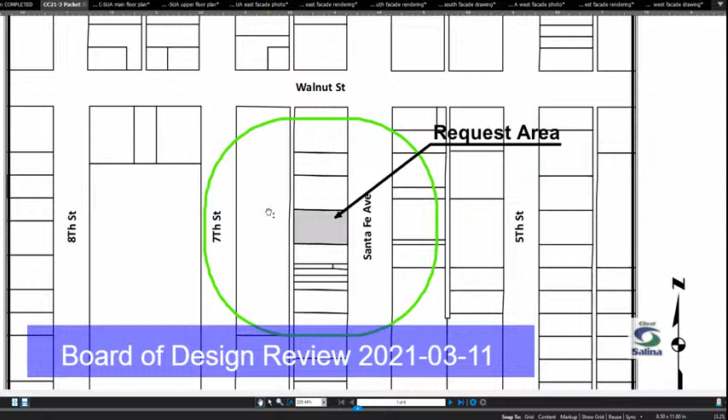Thank you, Mr. Chair. This application has been filed by Mr. Warren Eddiger on behalf of Salina Urology Care Center. The request is for approval of a certificate of compatibility to allow exterior facade modifications to be made to a building located on the west side of South Santa Fe Avenue in the downtown area. The specific legal description is the south half of lot 148 and all of lot 150 on Santa Fe in the original town of Salina. This property has various addresses ranging from 216 up to 222 South Santa Fe.

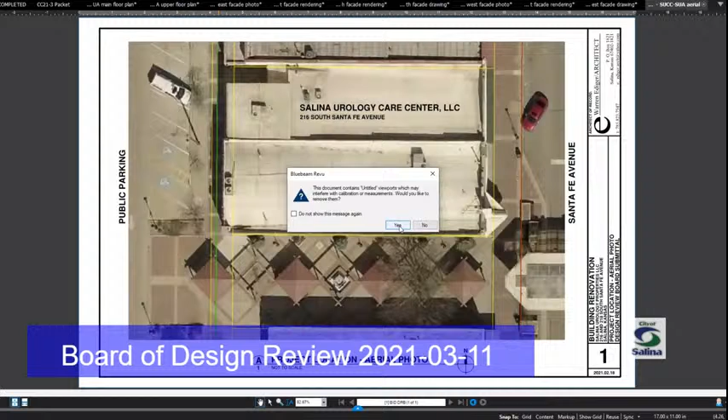So what we have here is a case of a change in ownership and a change in use. We had the long established Vogue Theater, which was in this location starting in 1938 and closed its doors in 1994. In 1995, the building was renovated by the Clubine and Rettele Chartered Accounting Office. They were located next door to the north and expanded into the theater space. When they completed their project, there were only a few features left from the theater, one of which remained was the theater marquee sign, which they retained and modified to include in their company name.

They worked with a local architect at that time, DMA Architects, and they had two cases that went before the Downtown Design Review Board in 1995. Some of it involved replacement of entry doors and doing things with the former ticket booth on the east wall of the building. There were also some inset windows along the Santa Fe storefront that had panels of upcoming movie events, and those were filled in. Then finally, the marquee sign was modified into a dark bronze and stone color, and obviously the theater message was removed and the lettering was changed to certified public accountants.

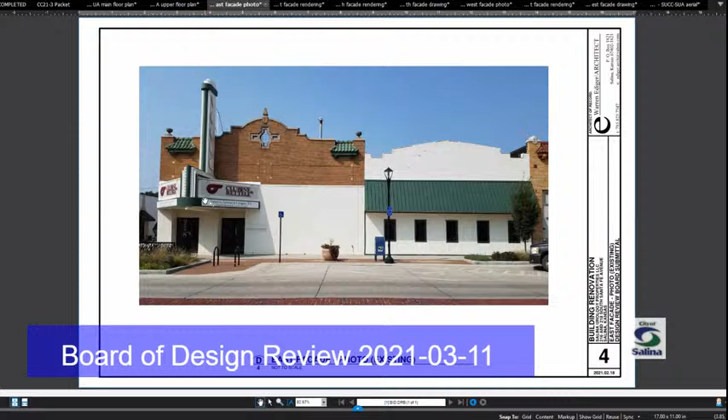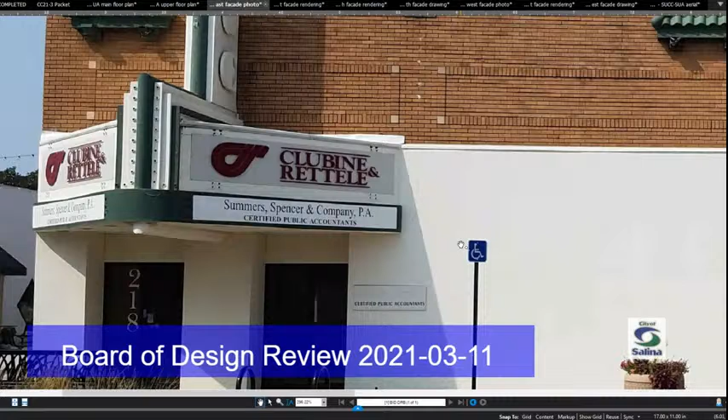Then in 2017, there was an application that came before the board to further modify the sign because the accounting firm merged with a firm known as Summers, Spencer and Company, and so the sign was modified to add those names. Now we have a new owner. The accounting firm has relocated, and the new owner has plans to renovate the building and convert it to a care clinic.

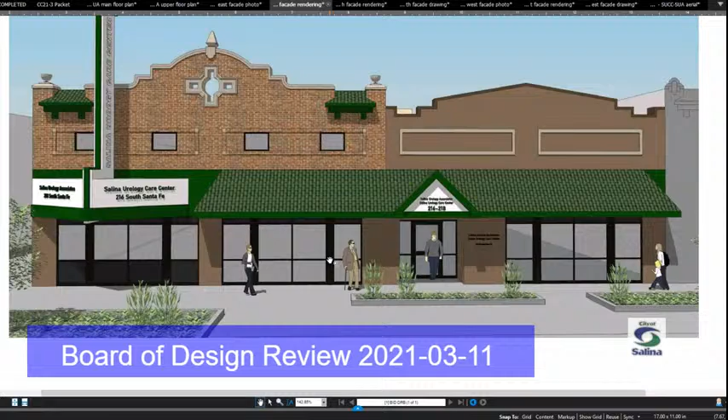They do plan to retain much of the exterior masonry, but they also plan to add and replace some exterior features. If I misdescribe or misstate any of these, we do have the architect here to correct me. But as we looked at this, we saw that there was going to be the placement of new stucco on the exterior in some locations. There would be a brand new storefront and storefront entrances.

The existing marquee sign would be repainted. There would be new wall signs added. And then in select locations, there's installation of a new roof canopy with metal roof tiles to match the existing ones on the building. So I've done my best in the report to summarize those changes as staff saw them. I think the most dramatic one is the new storefront window system and entrance that would be proposed on the front of the building.

It opens it up quite a bit for natural light and openings. There's a new roof canopy over the middle and north storefront bays, planned to match the existing tile on the building. There's new upper story windows on the south building and new stucco face and trim on the upper story of the north building.

For the most part, the existing stone and brick on the upper story will remain unchanged and look similar to the way it does today. On the south wall, the exterior brick wall will primarily remain unchanged.

On the west side, facing the public parking lot, there's a proposal to infill one of the existing windows. There's going to be new upper story windows installed. There'll be some new stucco face and trim applied to the west wall, and a new exterior stairway to the upper story will be constructed on the back side.

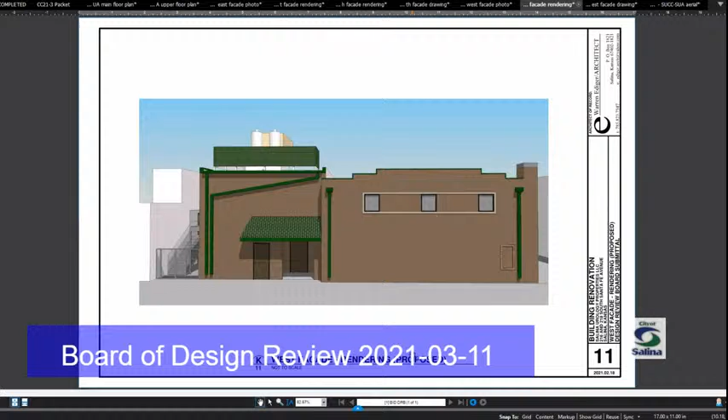So as we reviewed this, this is not new construction, but it is alterations. Any building materials that are used should be visually compatible with the predominant materials found in the downtown area. There's a goal to maintain the established building scale, to maintain alignment of horizontal elements along a street block.

Materials should be traditional to those used historically. And then the one that I think has the most for discussion and has different perspectives is one policy goal is to maintain all aspects of the storefront when possible.

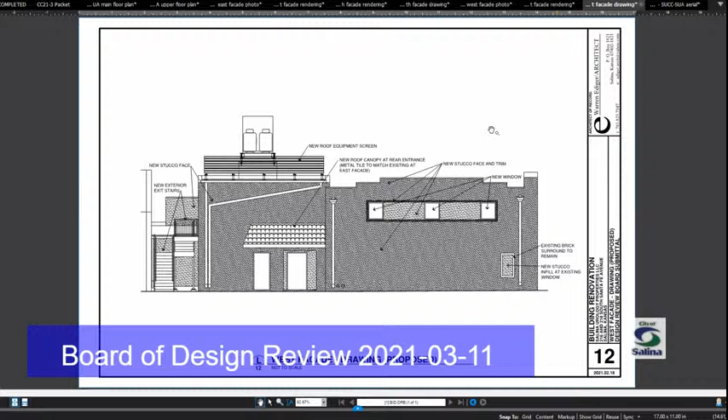There's some things that are contradictory there about maintaining storefronts and also making storefronts pedestrian friendly. And that's probably what we'll focus on.

There's also some guidelines about awnings, which would apply to the canopy as well. And then they are proposing to maintain the marquee sign.

This renovation covers all three building facades. We have a street face facade. We have the south facade that actually faces Spillman Plaza. So this building's open on three sides.

And so this storefront change would convert what today is largely a blank wall, and it would dramatically increase the ratio of glass on the front facade.

While the design guidelines recommend preservation of original storefronts that are intact and restoration instead of replacement wherever possible, in our review of this, staff doesn't believe that the existing storefront that's there today could be considered original because substantial modifications were made in 1995.

And so we've recommended that the board in their review of this look at surrounding buildings on this block and determine whether you think the change to a more of a glass facade would be compatible with the appearance of nearby buildings.

The other changes to the south and west are primarily maintenance related and cosmetic, and not as dramatic as the change on the front. The sign, while not necessarily historic, it was retained in 1994.

It is immediately recognizable and visible when people travel Santa Fe. The profile of that sign is not being altered. And so the replacement sign appears to respect the size, scale, and design of the original building facade and the sign.

We don't think that there's anything being done with the marquee sign that would detract from the building facade or any surrounding businesses.

This building has 75 feet in width, so it would allow up to 225 square feet of total sign area. So it's your responsibility to look at the signage and determine if it's in character with the surrounding property.

We just noted that all the building records associated with the Vogue Theater portion of this building are at 222 South Santa Fe, but that entrance was at the far south end, and this is going to have more of a center entry. So we do think 218 South Santa Fe is the appropriate address for this as proposed.

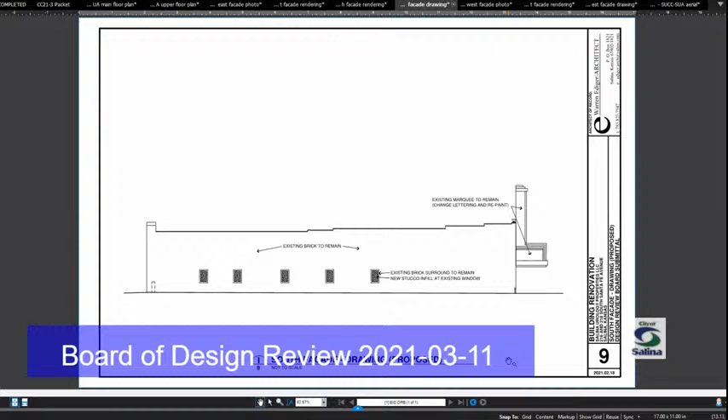We offered some findings that might support not approving this, and some of those deal with maintaining the original ratio of window and storefront openings to solid wall. But if the board views this as a step in the right direction, not the wrong direction, then not preserving a storefront that's not attractive in its own right is, we don't see as an issue.

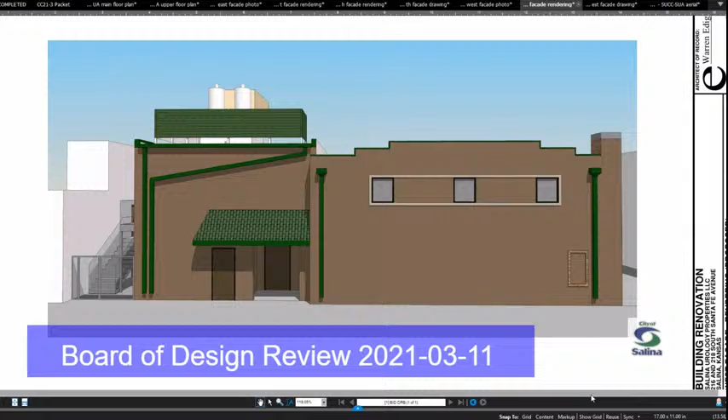So we've offered some findings that the use of finishes and materials for the signs are compatible with the predominant sign materials in the area. The sign would replace existing signage of the same physical dimension. There aren't going to be any architectural features obscured by the signage, and the existing profile of the marquee sign will not be altered.

So your alternatives this afternoon would be to approve the certificate of compatibility application as proposed, finding that it conforms with our design guidelines. You could approve it subject to any special conditions or revisions the board sees fit to apply. You could postpone consideration to acquire additional information, or you could deny the application upon making findings in support of denial.

So following review of the application and any additional information presented at the hearing, we would recommend that you take whatever action is in the best interest of preserving the character of downtown Salina.

If you choose option 2, to have any sort of condition of approval, we would just recommend our standard condition that if there are any significant changes to what was presented and approved by the board today, we would be notified and would determine whether any additional review by this board would be required before those changes are implemented.

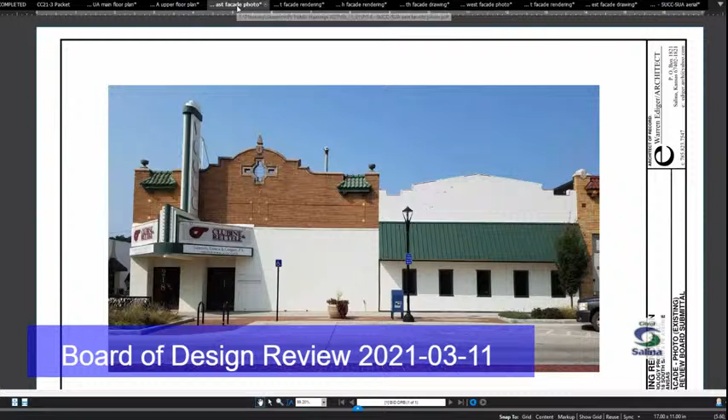On the north building, the stucco that is on there—the entire block is exposed brick, and it's interesting that this one building isn't. I didn't know if there's any history behind that, why stucco was applied, and why it's being maintained, or if it's something that could go back to the original brick. Are you referring to the lower level or both facades? Both facades, and then carrying across onto the lower level of the south building. I'm not sure if that's stucco or not, but just a little more clarification on why that one building is different than the entire block.

Can I go ahead and answer that? Sure. If you look at the south or west side of Santa Fe, starting with the Klubine building and going north, you'll find the majority of the buildings look like the Klubine building, Old Chicago, and the rest of them. The detailing and the time of construction are all very similar.

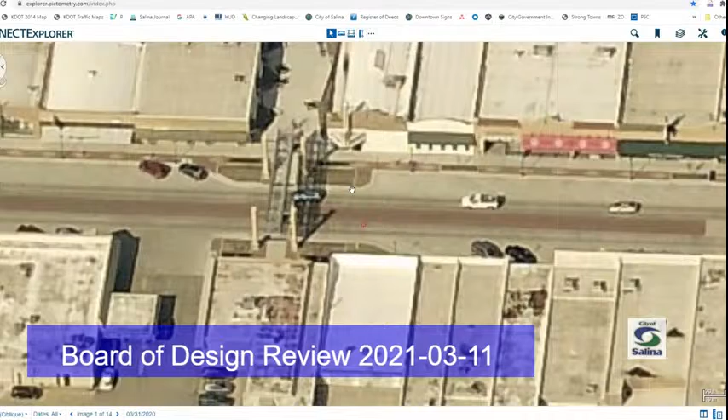There are a couple of exceptions, and one of them is the north building of these two. I don't know what it originally looked like. I went to the library trying to find old photographs, and found a postcard looking down the street in that direction, but it didn't tell me very much. What I can tell you is that the lower level, which looks like stucco, is actually a board that looks like stucco.

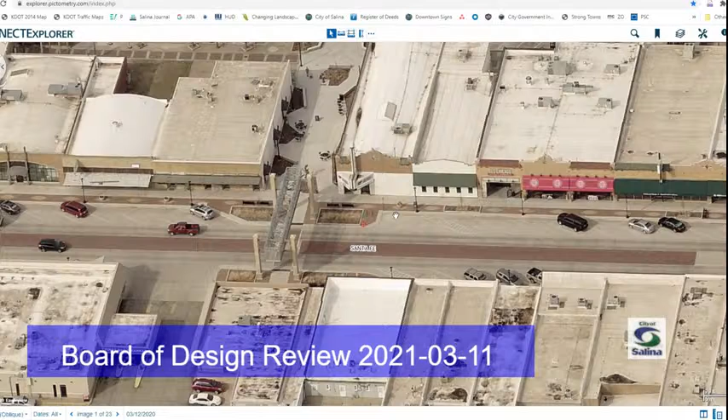The area above the canopy, with the white coating, is obviously not original. From what I've been able to find of the brick, I think they did that because they were having moisture problems with the brick—it looks like the brick had been losing some of its face. It's not the same brick as the two adjacent buildings. The lower level, when originally constructed, was entirely storefront, with the exception of about 18 inches of brick on either end.

We've had a permit to do interior demolition, and the interior of both buildings has been completely gutted, showing the remains. There are ghost marks on the existing concrete floor of the north building showing where the storefront was, with an angled recessed entrance. So if you went back to probably the 40s, this would be almost all glass on the lower level. The upper portion, I think, predated the two buildings on either side, just from its profile, and was not done in exactly the same character.

So there isn't any feasible way to go back and pull that coating off and have a viable brick up on the upper level. So what we've tried to do is get it from the passerby's point of view, looking more like what the adjacent building does.

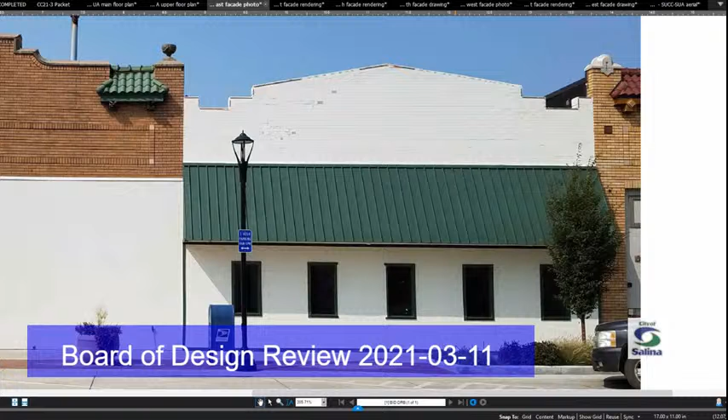The stucco will be colored similar to the brick. We have some raised pieces on it that match the raised brick on the facade on the Vogue Theater building and also on Old Chicago, so we get a little bit of that pattern in there.

The Vogue building, similarly, when it was originally constructed, was not a theater. It was, I think, an implement building—one of these was anyway. And it also was almost entirely storefront, very much like it is shown in the rendering.

There is a brick column in the center where we're showing the stucco portion of it. It's actually not brick anymore. And then the rest of it all was storefront, and we've exposed the lintel, the steel lintel up above. You can see where they had originally placed all of the glass, the storefront that would have been there.

So in a lot of ways, with the exception of the solid section to the north of the entrance to the building, the rest of the glass is very close to what was the proportion originally in the building when it was constructed.

We've left brick wherever we could. Where we've used stucco over it, it's either because the brick is not there any longer, or because it's in poor enough condition that we can't bring it back to a serviceable appearance and maintain it from a maintenance standpoint.

Okay. Thank you. I was doing a little bit of research, and my aunt is actually like 85 years old, and she kind of vaguely remembers some of this stuff. And that's exactly what she told me, that those were very much glass storefronts back in the day.

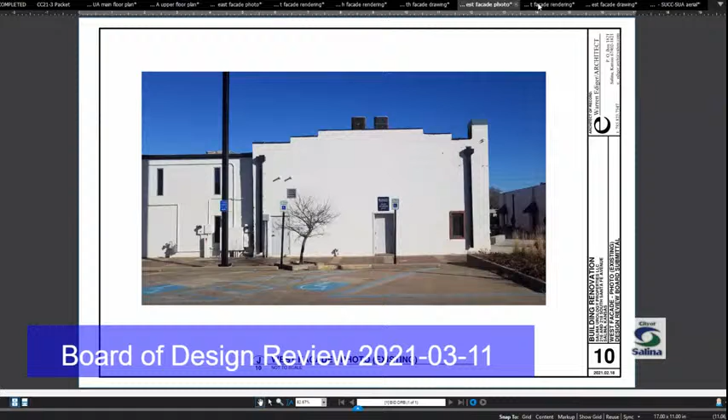But I see a big open space right next to one of our redone plazas—have you all considered partnering with Salina Arts and Humanities or something to do some sort of public art piece back there? Because it's like a beautiful blank wall right next to a plaza that could be really cool. That's just me with the artist side on that.

That question was in two parts, and the first had to do with the little raised section on the stucco that frames the windows and mimics what's being done with the brick. We can very easily take those corners and change them both with color and even make them protrude a little bit farther, so it's a closer representation of that, and I think we can do that.

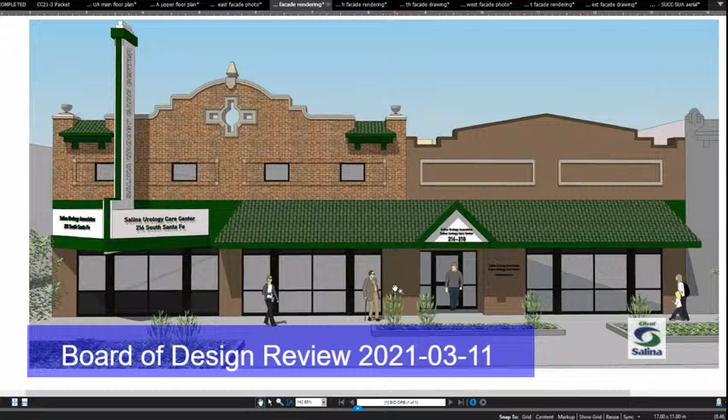As far as some artwork on the rear of the building, I personally would be very open to that. We'll have to visit with the owner about it and see what they want to do. One of the obvious questions is who maintains it and how do we protect it—it's an area that occasionally gets a little volunteer art, I'll put it.

So yeah, it's certainly something that I'll bring up with them, and see if they're interested. They can get in touch with Arts and Humanities and see what we can do.

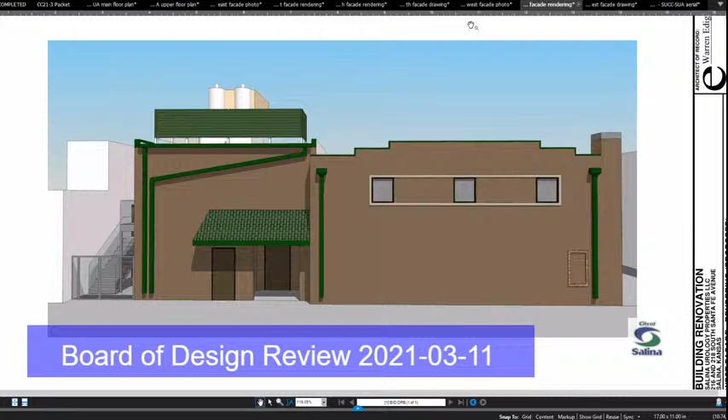And just for the benefit of the board and for Mr. Ediger, this primarily occurred in 2019, where we had a large committee developing guidelines for an arts and entertainment ordinance that would cover the downtown area, dealing with activities in the right of way.

And then also the visual environment. Those types of things have been found to be most successful when you have some sort of wall agreement between artists and the building owner, so there's a clear understanding of who owns the art, because there have been cases in Lawrence and other places where if it's not clearly documented, the building owner thinks they own the art, and the artist might think they own the art.

So we found that those things work best if there is a two-party agreement that obligates the owner to do maintenance and clarifies who actually owns the artwork. So we're trying to work with Arts and Humanities to set up a program that encourages that, but also that it be done in a way that documents things and protects the interests of both the artist and the building owner.